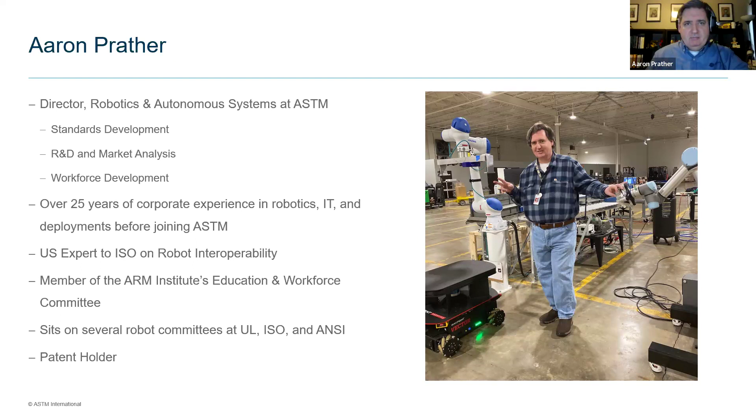So a little bit about ASTM. We are one of the oldest standards organizations. We're based outside of Philadelphia. We actually last year celebrated our 125th anniversary, and we were born out of the railroad industry.

The railroad industry was growing fast. It needed everyone to sort of be on the same page so we could actually build a coast-to-coast network of trains, and there had to be certain standards so trains could do that and actually go anywhere the tracks allowed them to go. So ASTM actually was born out of the railroad industry to help set their standards.

Now we are in pretty much every industry there is on this planet. We have published over 12,700 standards globally. We will probably this year cross 13,000 standards in various industries.

We also look at different disciplines. We are not bound just here in North America. Our standards are used everywhere across the globe. They are sometimes referenced in trade agreements between countries to make sure, again, that certain standards are being met regardless of what country the business is coming out of. Certain standards are met so a global economy could be built.

We work with manufacturers, we work with material scientists. We do everything and anything, and we'll touch on some of those here in a little bit. My focus is on the robotics side. But just before we fully close out, again, ASTM standards are everywhere.

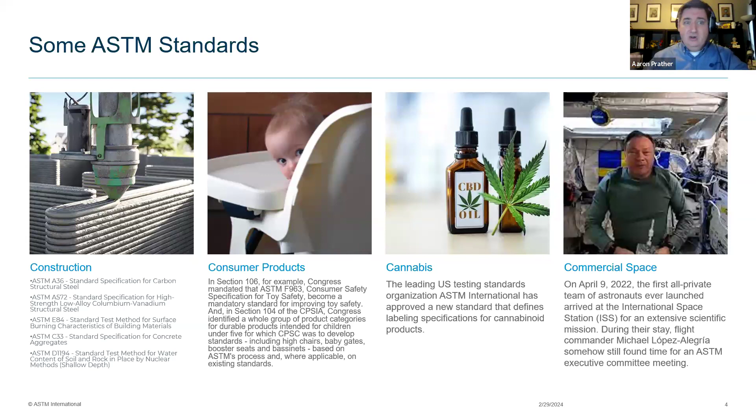Another one we're really proud of is we've set a lot of the standards for commercial space flights. This is a picture of Michael Lopez-Alegria, chairman of one of our committees that sets standards for commercial space flights. This is him up on the space station, and he actually conducted a committee meeting from the International Space Station to make sure they got the votes and consensus built around a certain standard for spacecraft. He ran that from the space station. So standards are everywhere, not only on the planet, but now up in space as well.

So we're not alone in this. ASTM is one of many standards development organizations, or SDOs as we call ourselves. The big ones, of course, are the ones you know: ISO, ANSI, UL, IEEE, but the list goes on. We're the bigger players because we're more on a global scale. We cover numerous industries. There are some standards organizations that focus strictly on a specific industry, and that's fine.

Sometimes those are some of the strongest standards groups because they are so hyper-focused into their industry. But global standards groups like ASTM, like ISO, like UL, we make sure global trade and global businesses can be done, because we help set standards agreed to by people across the globe. And that's the beauty of standards: they are consensus-based standards that a vast majority, if not almost everybody, depending on how the standard has to be voted on, agree that is what they want to be held to as their standard.

One key act that happened here in the United States that is very important is the National Technology Transfer and Advancement Act. This was signed back in 1996, during the Clinton administration. This act really opened up markets by helping speed up the technology transfers needed to speed products to market. It very much helped open up the federal laboratories at NIST and other locations to help speed up research that will help businesses get product to market faster.

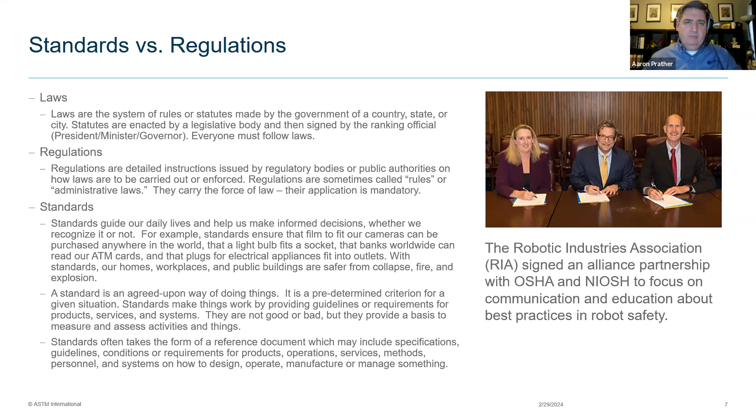So this is why knowing your standards in your industry are very key, because there might be a regulatory agency further up the stream that's going to enforce that standard under their purview. So again, standards are everywhere. And after this presentation, a lot of you might really start paying attention to some of the products around you, looking for these standards marks.

ASTM, we do a lot of safety toe footwear tests. So if you wear steel toes or the composite toe shoes, there's an actual ASTM test that shoe can go through. And if it passes that test, the maker of that shoe can put in that they tested this to ASTM F2413 for safety toe footwear.

If you look at all your electronics, you're going to see the UL symbol on that, meaning UL has tested that piece of electronics against one of their standards.

UL was born out of the Great Chicago World's Fair fire, where they showed off the power of electricity and lighting, and then the whole place caught on fire and burned down. The founder of UL is like, we probably should have standards around electrical safety, and therefore UL was born.

And it's just amazing what they cover now. And if we think about everything in our life that is powered by electricity, UL standards are helping keep us safe. And we all know about ISO.

9001 is one of those big ones that every company wants to get certified to, saying that they are a quality management. That is what ISO 9001 is. It is a quality management standard that shows that you have processes and procedures in place within your business that produces quality management results. And you actually have to go through an audit to get to that standard, to show that you are in compliance with that standard.

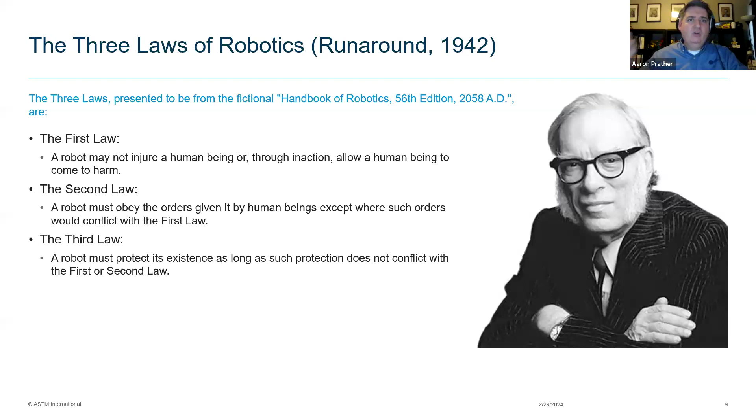Again, these are great thought exercises. The practicality of them in our modern world is a little harder, but as a person who writes standards, we always think about this, and we focus on the first law — a robot should never hurt somebody. That's where the vast majority of our minds are. We'll come to the military and police robots down the road, but in general, the main thing is a robot should never hurt a human.

And there is actually a standard that calls that out, and that is ISO 10218. This is the top of the pyramid when it comes to robot safety standards. This is the one that everyone looks up to. This is the one that governs everyone. It's been around the longest, and it really does ensure that we have safe robot installs.

And when you look at the industry, there's only been a handful of deaths involving a robot and a human, and the vast majority of those have fallen through some of the cracks or gaps that have been identified in these standards. We do work to fill those gaps as we learn.

Just to give you a history on ISO 10218, it's actually broken into two parts. Part one is focused strictly on the person making the robot — what they should follow, what safety features should they put in the robot itself to make sure it can operate safely. Part two is directed to the integrator of the robot system. The integrator takes that one robot that has already gone through part one of the standard and puts it into a larger application. So part one only addresses the robot itself — sometimes it doesn't even address the end effector or anything else, just the robot itself.

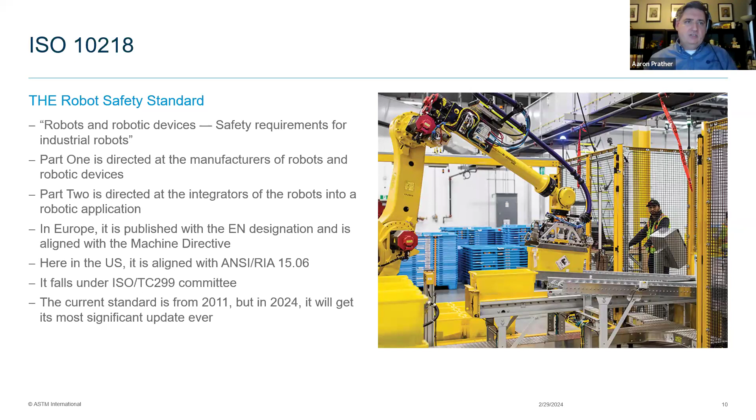ISO 10218 is going to go from about 100 plus pages from when it was published in 2011 to over 200 pages, just to address some of these newer robot technologies that have come out since, like collaborative robots, and various vision systems are being addressed. All that is going in. The standard is getting bigger just to address more of the technologies that have come out. We're hoping to publish that this year, this summer. But this is the main standard that everyone holds their robots to, ISO 10218.

As I mentioned earlier, 10218 is broken up into two parts. The first one is the manufacturers and the integrators. There are three groups when we talk about robot safety. The manufacturer is a big one. Who makes the robot? Are you making a safe robot? Does it have safety features built into it? If not, what are the other types of ways to keep it safe?

The integrators are the ones that then put the robot into an application like a welding one. But the third group that ISO 10218 does not address are the end users, the actual companies - how are they using that robot? What is their responsibility? Because as soon as a robot is installed and the integrator is done, they're done with their job. So now the safety really falls on the end user. There's a lot of work taking place now to address some of the gaps that have been missing from the manufacturers or integrators part of the process to the end users.

Because if an end user changes a feature of a robot cell, what are they? Are they still the end user, or are they now taking on the role of the integrator? That's why I put that line down there at the bottom. Some companies might actually jump between these groups in their robot journey.

There are some companies like Amazon that actually make their own robots. So they are actually their own robot manufacturer. They also then take that robot that they built themselves and they integrate it into their warehouses. So they're now the integrator. But then the day-to-day operations at Amazon, they're the end users using those robots. So the three different roles that apply to each of these three groups can sometimes get tricky. That's where standards organizations like mine are trying to address where some of these gaps are in each of these different types of groups and who has what.

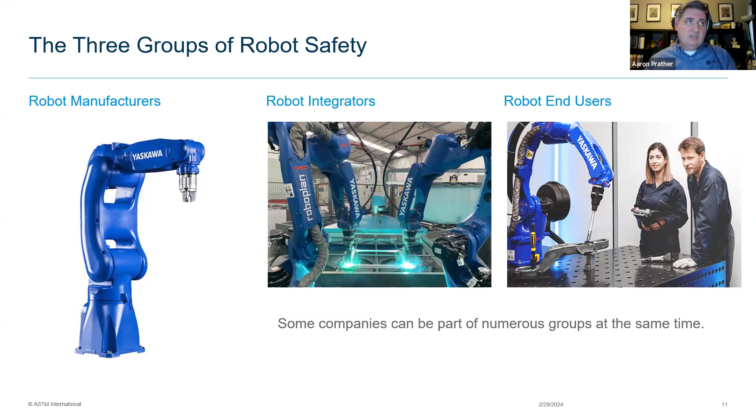So what does each of the standards groups do to address these? ISO is focused mostly on safety. They do some test of performance, but ISO's main focus is advancing the marketplace, getting robots faster out to the market, but in a safe manner. UL focuses on safety, but more from an electrical fire prevention perspective. ANSI here in North America focuses on application safety and ensuring that North America is aligned with the other key standards at ISO or ASTM, especially in terms of general machine safety. ANSI has probably some of the best general machinery safety standards in the world, and some of those have actually become ISO or ASTM standards themselves.

And then finally, my group, ASTM International - we do safety, but when it comes to robotics, ISO's done such a great job of focusing on robot safety that we're focused more on test performance standards and how they support the larger groups. A lot of our standards are actually baseline standards for some of the other groups. Case in point, we do a lot of the electrical connection standards, making sure there's no sparks. UL leverages those into bigger standards to make sure those sparks don't become fires.

So they leverage a lot of our very baseline standards into their bigger standards to ensure it doesn't become a bigger problem if you're following those core standards.

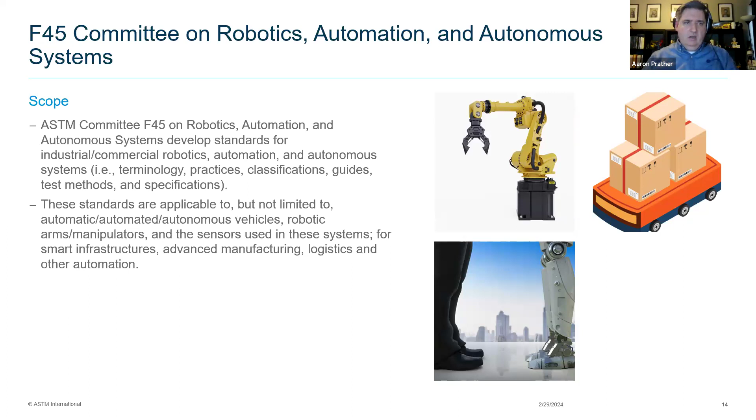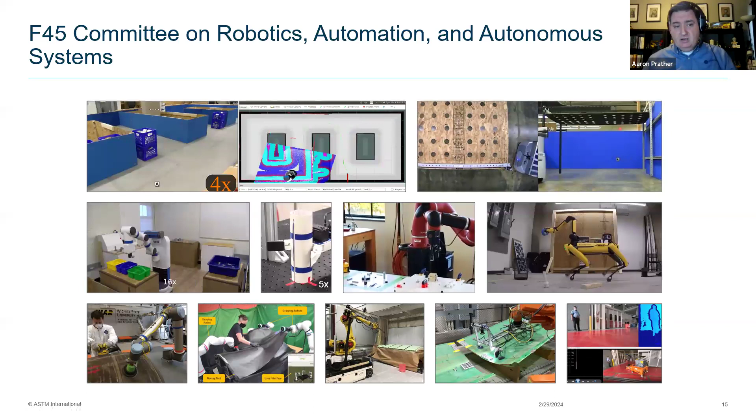So this is just a couple of the types of tests that they have been working on. They've been working on navigation tests. They've been working on pick and place types of applications. How do you pull cloth? What does that look like? How do you detect certain things - these are some of their standards.

As I stated earlier, they were established initially as a driverless automatic guided vehicle group back in 2014. They have definitely pivoted where they cover a lot more. They have 11 approved standards that have been published. They are currently working on 14 more new standards. That's how fast the industry is growing, that they've already identified 14 new work items that they have to get through. They have broken themselves into subcommittees that focus on very specific areas.

One works on environmental conditions around the robot. Another one works on docking and navigation for the robot. Object detection and protection is another subcommittee. System communications and interoperability is another team on the committee. Grasping and manipulation is another group.

The latest one is a legged robot. We've seen a fast rise in legged robots, and so this group has come together under F45 that works strictly on just robots that have legs. What are the safety considerations around them? How do you test them? How do you make sure they don't fall over? That's what that group works on.

Each of these committees meets monthly virtually, but they also come together twice every year for in-person meetings where they actually sit down and go over various items. They look at the tests that are being developed, the standards that are coming out of those tests. What do those look like?

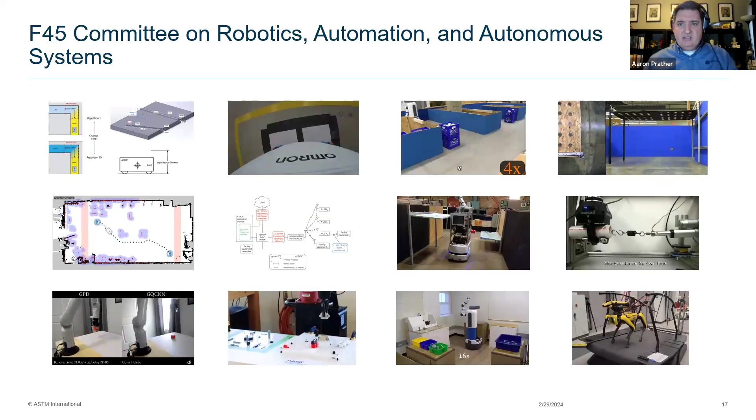So what are some of the types of standards you might come across? Most standards fall into one of these six buckets. Either they're a test method, a practice, a specification, a classification, a guide, or a terminology.

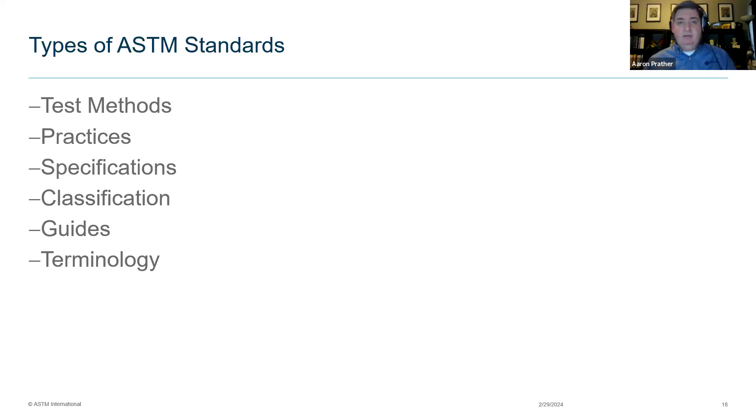What does that mean? Well, a test method is pretty straightforward - you come up with a test, you measure it, you show the results. Case in point, your robot arm is fully extended. Now measure what that full extension looks like. So if you say your robot can reach 8 feet, when I fully extend it, it should reach 8 feet. This should be a very pass-fail test. You'd be amazed how many fail that test based off of what they're saying their robot can do versus what it can do. This is why we do these tests, to prove that you either have that capability or you don't have that capability.

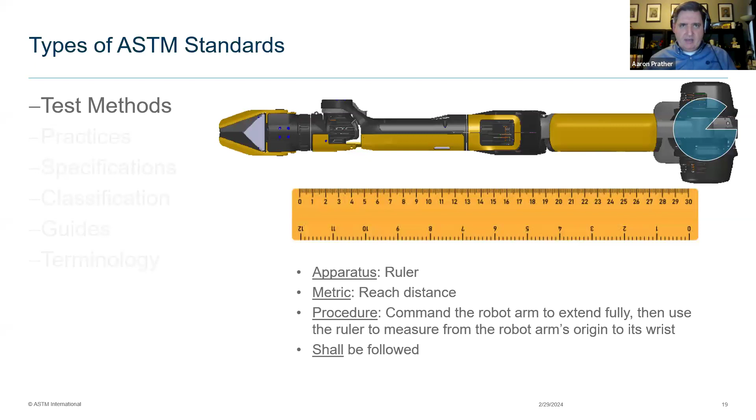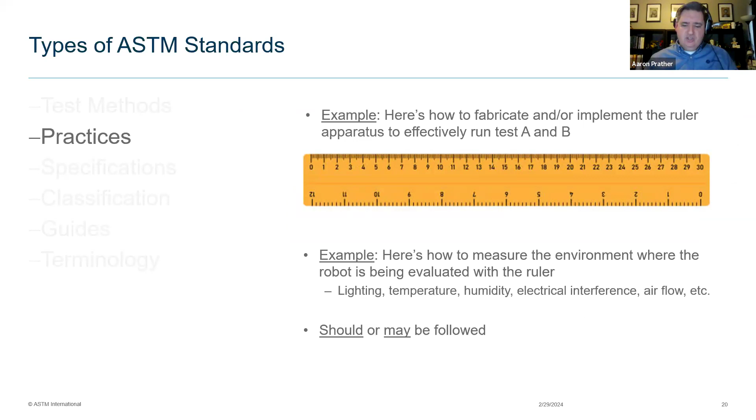Practice - this is how you would measure the standard, how do you actually conduct the standard. Here we would actually lay out in a standard of its own how to set up the test, how will you do the test, and it literally just goes through all the various setups, looking at lighting, temperature, humidity, so you can make sure that your test can be duplicated by somebody else by following this practice.

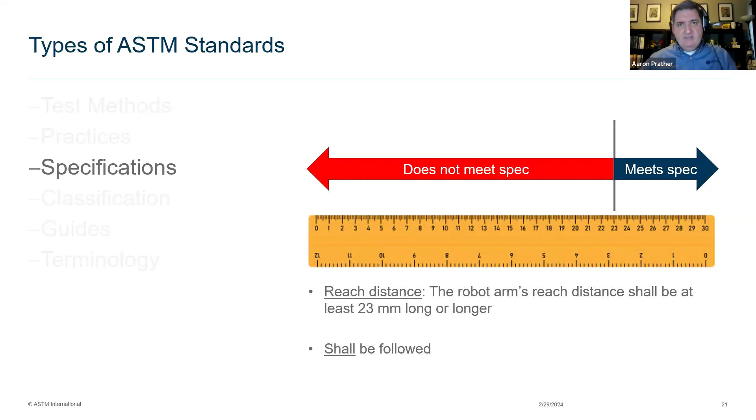These kind of specs help determine what kind of parts normally go into a robot. So if you have a robot that needs certain capabilities to go fast but also stop quickly, we'd have a specification for your vision and braking systems to determine what sensor you need to give you that speed, but also the safety of stopping in a timely manner.

Classification, very simple: is your robot small, medium, or large? Well, what sets those parameters? This is the type of classification.

We're seeing a lot of commonality now with marine robots starting to get into classification standards, because if you have a marine robot, first thing you need to know is how deep it can dive—is it only rated to 50 meters or 100 meters? This is a new type of classification we're having to set standards for, so consumers know which robot fits their specific use case.

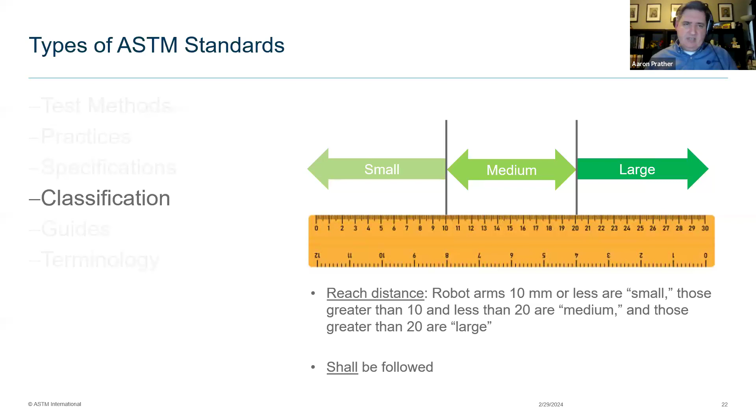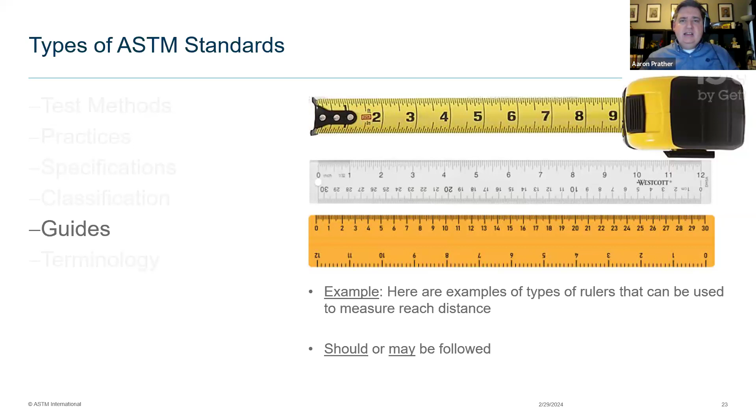So it's a guide—we'd put that in there. You need this specific piece of equipment to do this measurement. That would be in the guide.

Terminology is key because we all have to be talking a common language. So what is an end effector? What is an origin point? What is a manipulator? We actually have a terminology guide, and out of all the standards we have to maintain, terminology can get very tricky very fast, because we want to make sure we're using the same terms across the board, across each country.

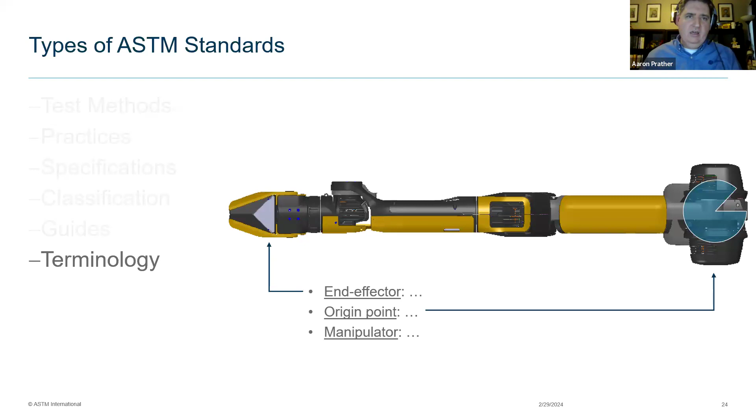So when we say what an end effector is, everyone knows what we're talking about. Because if you don't define your terminology, all your other standards could go sideways very quickly. And if someone else thinks that term means something else, it throws off the rest of the tests. So some examples—this is from our object detection standard.

They actually made a guide of test objects—various objects you should have your mobile robot tested against, to make sure it can detect them. You'd be surprised how some of these objects throw robots for a loop because they just can't see certain things. Ladders are the biggest one, and trust me, if you're working in a warehouse, you want those robots to know if they can detect a ladder, because there are so many around.

Same thing with forklift tines—I've seen numerous robots in warehouses run into forklift tines because they just couldn't see them. Test your robot against those in a test artifact kit. We've actually written a list of various objects you should test your robot against, and you can just go buy our guide and get those items.

We try to make sure every item in our guides can easily be obtained at a Home Depot, Lowe's, or Walmart, so we don't go asking for very high-end stuff.

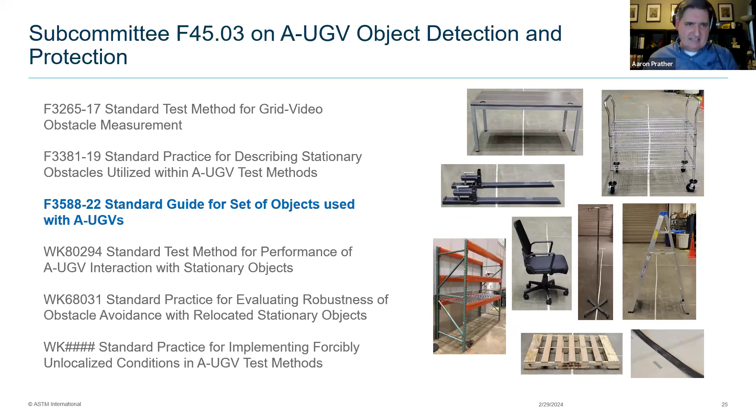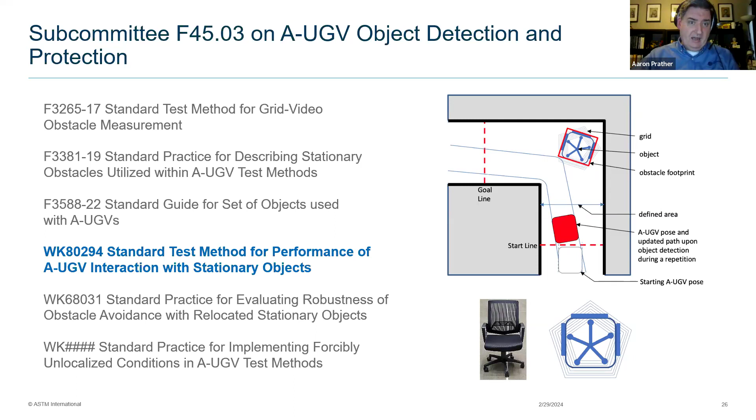After you have those obstacles, we'll show you a test methodology for how to set up your test for your mobile robot. So if you build a maze—and I'll show you the maze in a bit—where do you put the chair, where do you put the ladder? Can you create as many real world examples to test your robot against, so you can show it can detect and avoid those items and therefore operate safely in your environment because it won't run into them.

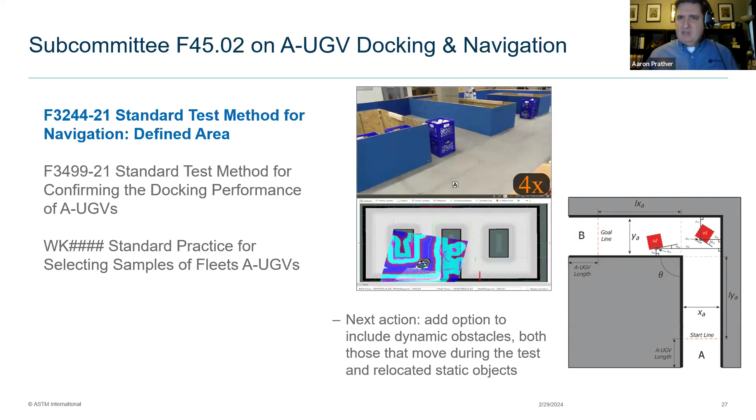So now that we've done that, here's the test. We give you the test methodology to navigate in a defined space. This is one of the robots, and you see we put a crate there. It has to detect it and make sure it gets around it. We set all this up based on the earlier two standards we just talked about.

And then we'll even take it another step further. Not only can the robot navigate and avoid that, but here we want it to actually dock in a very specific area so it can charge itself. So in the first test, we're showing that it can avoid certain things. Now we want it to actually find something, get up to it, and do something with it—in this case, charge.

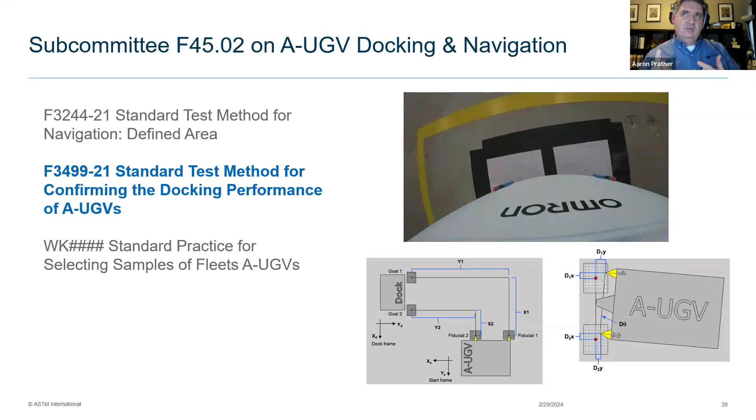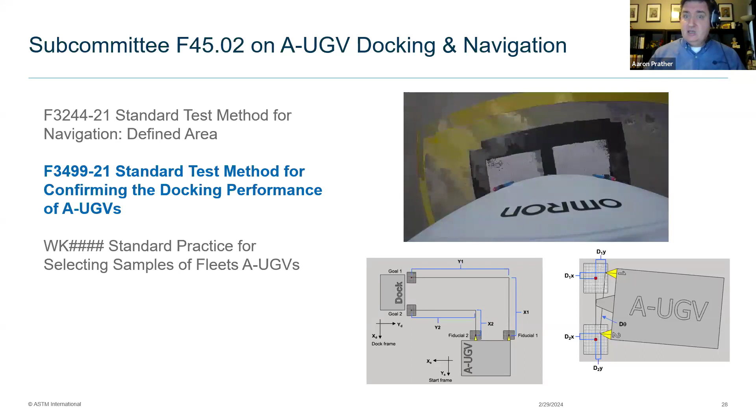So the whole thing is, we've set up a test to show what artifacts you should put in your test, how to set up the test, what the test will look like, how to record the results, and now how to do something completely opposite in the test to show that you can also do that. That's the kind of thing robot manufacturers, integrators, and end users want to see in their robots. They want to see that their robots can do these things or not do these things, and document it all. The standard allows them to do that.

And then our grasping robot test is another one. Here we're taking years of research from NIST, having the robot grasp this test artifact that has measurable nodes in it, so it can measure the strength of the grasp. Because if you're an end user, a FedEx, an Amazon, and you want to buy a grasper, you want to ensure it has enough strength to actually hold on to something, but not too much strength that it crushes it. So this is another test the marketplace has asked for—show me the exact strength your end effector has in grasping, because I want to make sure it can pick up what I want, but not damage it at the same time.

This is a standard test you can do using this test artifact with these measurable devices inside of it. You can do this on your own, or you can hire a lab to perform the test for you if you want them to.

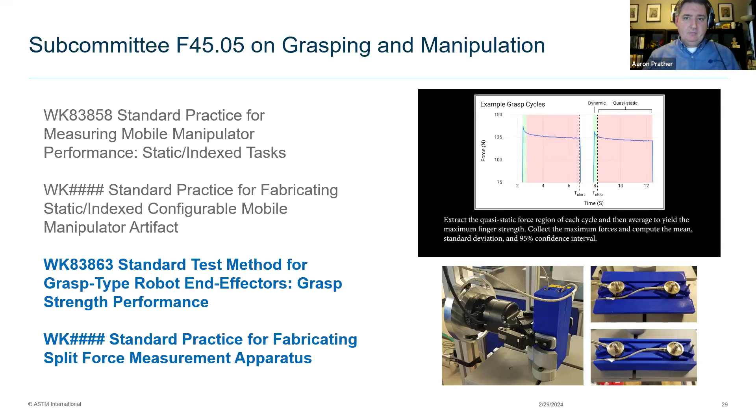So going forward, regardless of what standards organization you're looking at, after you publish a standard you're always going to ask the following questions: what are we still missing? What is the most important or least important thing we should address next? Are there still gaps even after we've published the standard? What areas aren't covered? So you're always constantly looking for what's the next thing we have to update, what new technology we have to address. Our work is never done.

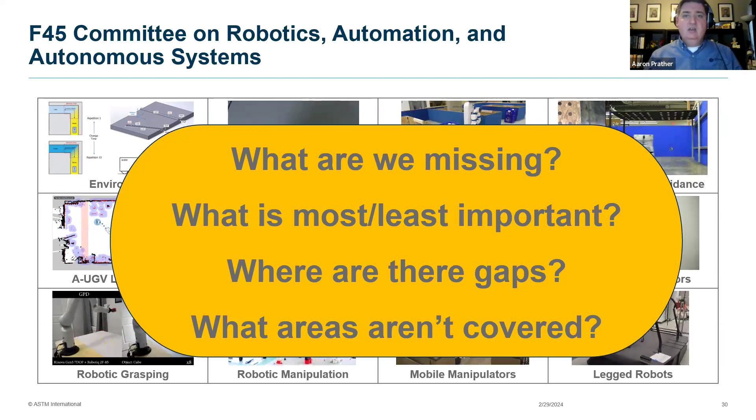Based on some of these core standards, as I said, 10218 has been around a long time. It just keeps getting updated as the technology gets better. That happens with every standard. At ASTM, a standard lives for 5 years. As soon as its fifth year is done, it enters a period of review—either it needs to be updated, or it just needs to be reapproved because nothing has changed. But if no vote or continuation is done by the 7th year, it is taken off the books. That's how we ensure no bad standards stay on our books. After 5 years it enters review, it either gets updated or, if the standard's still solid and nothing has changed, it gets reapproved and goes back in. If that is not done by the 7th year, the standard gets kicked out and is gone. So this is how we make sure we stay up to date.

So what is coming? It is very clear that we have to have end user standards, and ANSI and A3 are already developing what is going to be called the Part 3s. As I mentioned earlier, ISO 10218 has 2 parts—Part 1 is the manufacturer, Part 2 is the integrator. These new Part 3s are going to be focused on end users and what their responsibility is after the integrator has installed it, made sure it works, and handed over the keys—they're now done.

What is the ongoing responsibility of the end users to maintain that system? That is being worked on now. They're going to actually write two Part 3s. One will focus on robotic arms, falling under R15.06 with ANSI and A3, and R15.08 for mobile robots will have a Part 3 for its end users.

This will create an enforcement pathway for OSHA. This new standard will be something OSHA can use if they have an incident with a robot and a human at a work site. They'll be able to look at this Part 3 and ask the end user, why weren't you following it? It's going to be very critical that everyone stays up to date on these standards, because a regulatory agency like OSHA can and will use it for enforcement purposes.

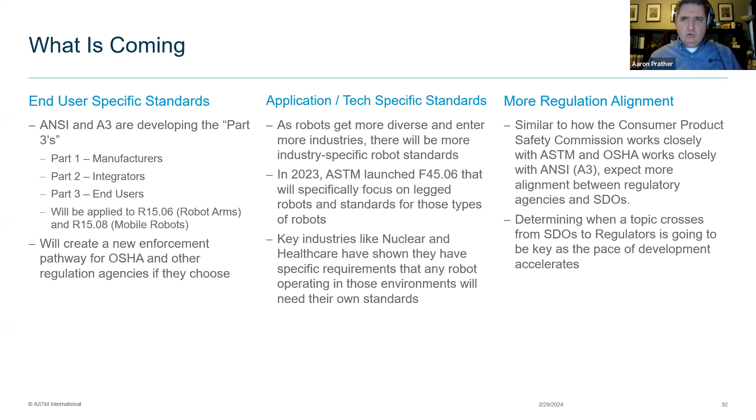So what's already on the schedule? OSHA inspectors are going through robotics training. They are being trained on the standards that are pertinent to them and the industries they cover. So another big thing for business owners on the call—you might want to make sure you're up to speed on the robot safety standards, because the last thing you want is an OSHA inspector knowing more about robot safety than you do.

If you are putting robots into your environment, I highly recommend you start getting up to speed on all the robot safety and performance standards that the OSHA inspectors are being trained on. Right now, they are already over 50% done with most of the inspectors. This year they'll finish up—every OSHA inspector by the end of 2024 should have gone through their training.

The new grasping standards we're working on will be published this year. Those are based off about 5 years of research at NIST, and we're publishing both fixed and mobile robot standards—so a robotic arm grasping something, but also standards for mobile robots that can move through a space, grab something, and take it somewhere else. A lot more standards are coming out around robots that can grasp things and pick them up.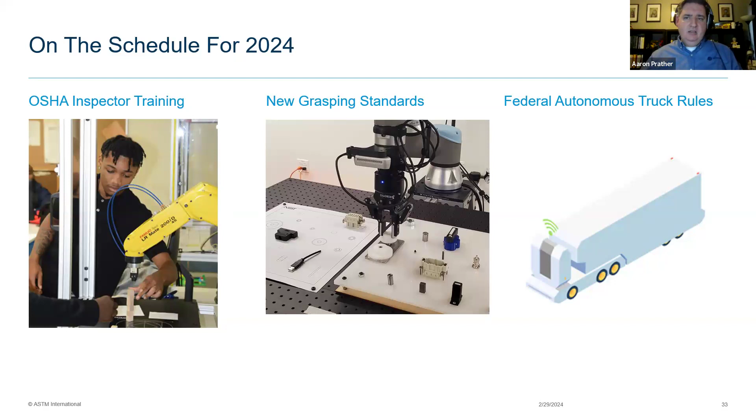How strong can they do that? How weakly can they do that? How accurately can they do that? All that's going to be shown through these standards. Finally, the federal government is going to start leveraging some of the standards around autonomous trucks that have been developed by numerous SDOs—SAE is a big one. There will be federal rules coming down the pipe this summer around autonomous trucks, based off standards that have already been developed. They are moving up the chain to the regulatory phase.

So in closing, how in all this talk can you get involved? How can you actually participate in the standards making process?

Well, the first one is join a committee. All of us SDOs are always looking for new members. The only caveat is that you participate and you vote, because we have to have consensus. Joining a committee and not doing any work is bad. Joining a committee and not voting is the worst thing you can do.

If you want to be part of the process, we will welcome you with open arms. We expect you to contribute and to vote. You are allowed to abstain instead of voting - that's fine, all of us would rather you abstain than not vote at all, because abstaining at least counts in the totals.

So if you really want to do standards work, go find the organization that's best for you. Be that ASTM - I will gladly take anyone that wants to work on our standards. ISO would gladly take anyone. ANSI, A3, the list goes on and on. All we ask is that you participate and vote, that you're actually a productive member. And if that's the case, we will love to have you.